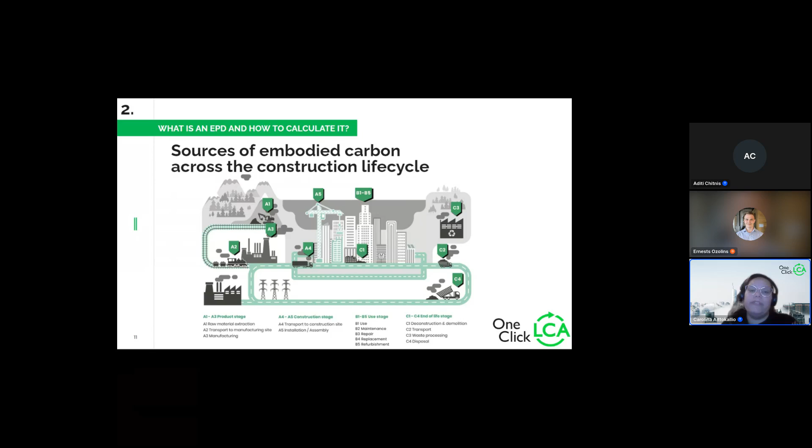After this, we have the C stage, that is comprised by the end of life. So it's everything about the deconstruction of that material, the transportation to the waste handling facility, the waste processing, and the disposal. Apart from these, we also have in the use stage the operational energy and water use, and we also have another stage, which is the D stage, that comes with the benefits and loads beyond the system boundary.

So now we're going to talk about the European roadmap for decarbonization and the CBAM. And it's very important to talk about these because as of very recently, doing EPDs has been in a way voluntary, but this is about to change and very fast. So the European Green Deal is a climate pact setting in motion different policies by the European Commission to review the laws on climate matters and to introduce new legislation on circular economy, building renovation, biodiversity, farming and innovation. In terms of the targeted emission reductions, they have been changed from 50% to 55% by 2030, with the goal of making Europe the first climate neutral continent by 2050.

So if these goals are going to be met, there has to be other policies that are going to detail how these goals are going to be met. And these will affect not only the construction of buildings and infrastructure, but also the products that are involved in it. In terms of the proposal regulation for eco-design for sustainable products, there are some guidelines that are being taken into consideration. For example, extending the product life cycle, reducing products' carbon and environmental footprint through the life cycle assessment methodology, ensuring products are in line with circular economy principles and carbon neutrality, also minimizing and preventing waste while focusing on material recovery, and maximizing the material's potential for recycling.

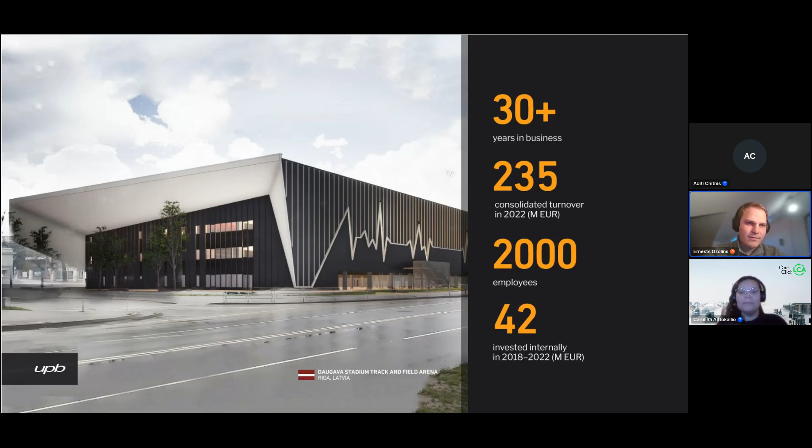Okay, so hi, I'm Ernest. I'm from UPB. I'm a product manager of precast concrete products. And today I'm going to talk to you about CO2 net zero strategies and the short-term activities that we as a group are taking to reach these targets. But firstly, about UPB Group. We are one of the leading industrial holdings in the Baltic states, and we provide full design and build projects and products for Latvian and also export markets. We are 30 plus years in business, and we have 2,000 plus employees working in the company.

About the CO2 problem, and why do we even bother reducing emissions? The carbon emissions cause the greenhouse effect, which then leads to climate change. But climate change then causes an increase in natural disasters such as wildfires, hurricanes, floods, and so on. Then in 2015, there was the Paris Agreement, where countries around the world agreed to reduce the carbon emissions made by each of the countries, and that kick-started the thinking about emissions and so on.

But then in 2021, the EU signed a climate act, which essentially stated that by 2050, the EU wants to become a carbon neutral continent. And that then also causes new rivalries between companies to see which company can provide a greener solution for each of the projects. Then what are the net zero strategies that can be implemented? Firstly, we can start by minimizing waste, which would be prefabricated products instead of cast on site.

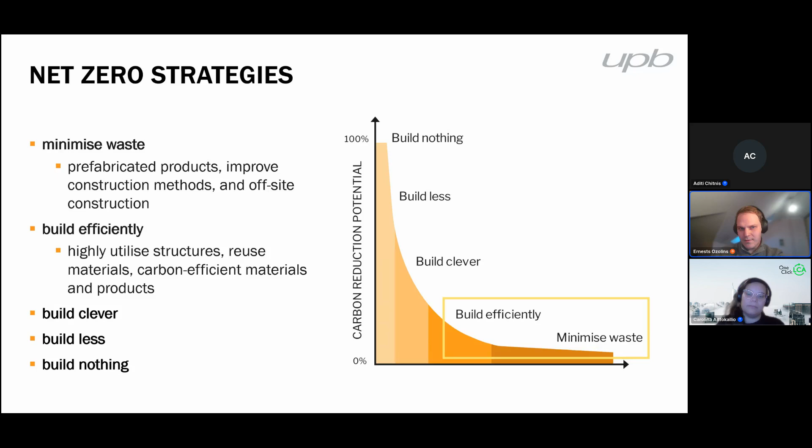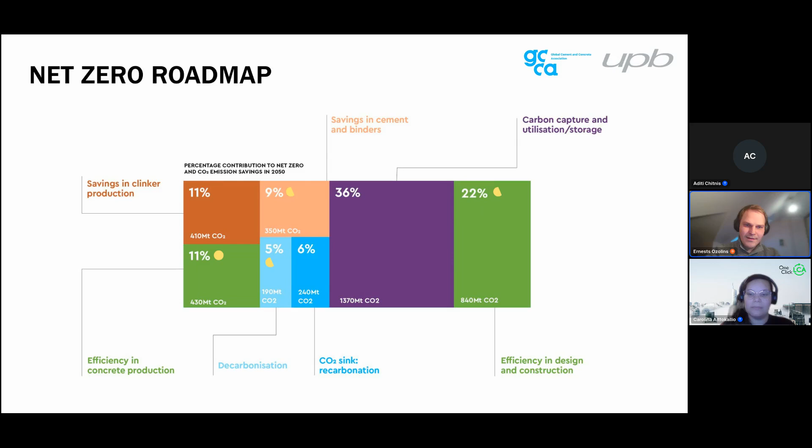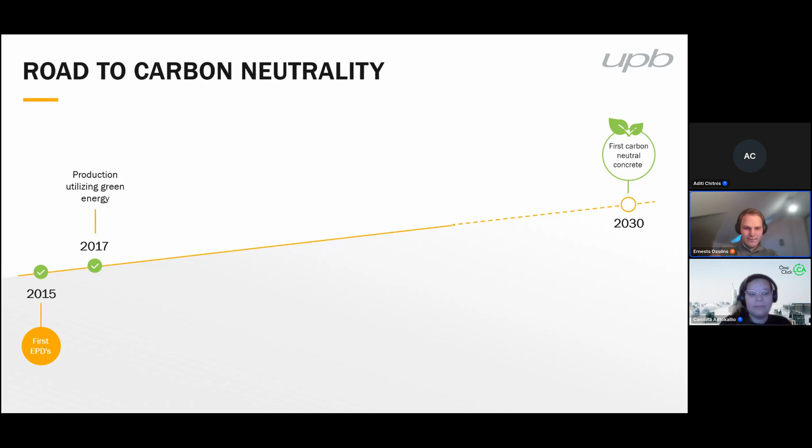Then, as a group, our road to carbon neutrality started in 2015 when we created our first initial EPDs. In this case, we didn't do it ourselves, but there was an outside company that did it for us. But then in 2017, we started using green energy in the factories instead of the normal energy that can be produced from fossil fuels. And then in 2018, we implemented a new steel mesh welding machine in the factory that significantly reduced our steel waste amounts in production.

And then in 2019, there was this concrete research center, which is like internal brains for concrete production. There was a great reorganization of that, which led to 2020 when we updated our EPDs and achieved much better results. Not only because we did all of these things before, but we also used One Click LCA to produce our EPDs this time ourselves, which allowed us to really understand what makes up the carbon footprint of our product. Then in 2021, we implemented a concrete and wastewater recycling system in our production facilities.

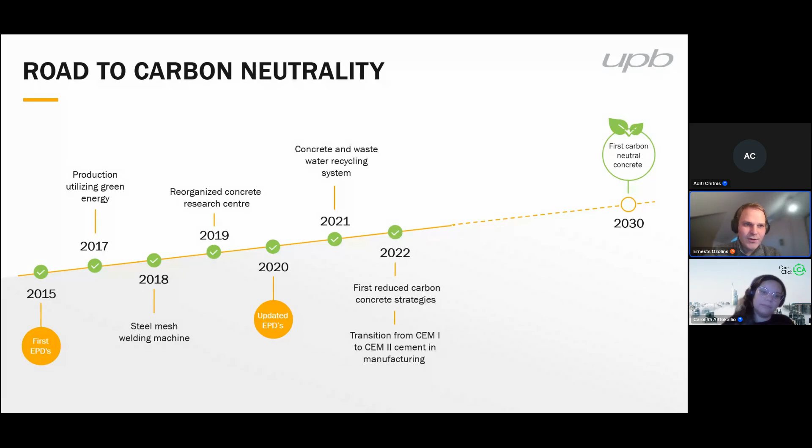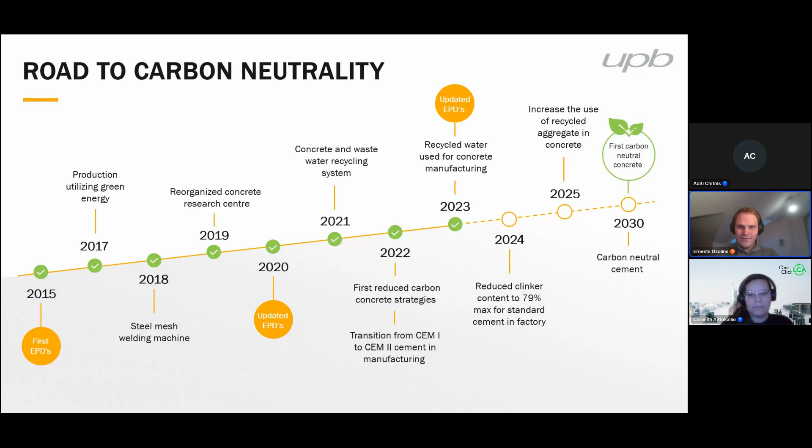And in 2022, we developed our first reduced carbon strategies for production and also moved from CEM I to CEM II as a default cement in the factory. Then this year, we started using the recycled water in concrete manufacturing, as well as already updated our EPDs from 2020. As you can see, the amount of years between each EPD is already starting to shrink. And then next year, we are planning to use even greener cement than our current CEM II as a default cement in production. And then in 2025, we're planning to increase the recycled aggregate content in our concrete. And then the aim for 2030 is to produce the first concrete for which the cement has been produced with the carbon capture technology. And that would be our aim for the carbon neutral concrete in the future.

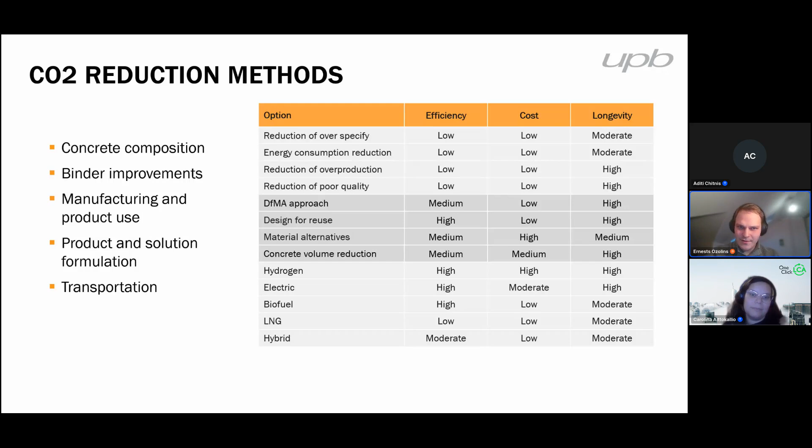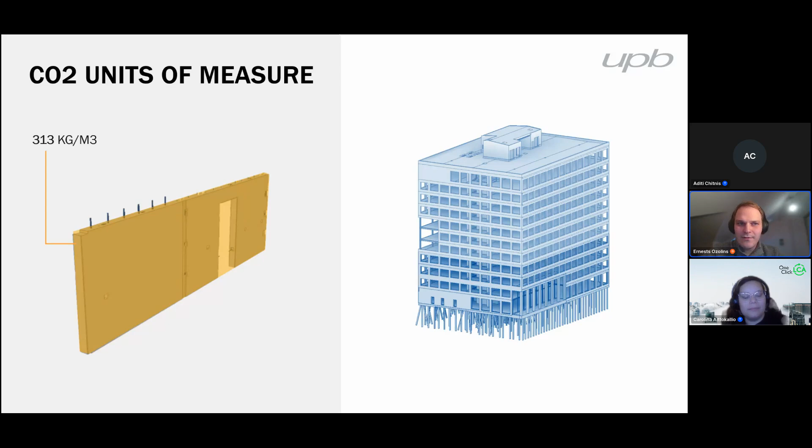And another really important thing when looking at EPDs is the units of measurement. For example, there's a precast concrete wall here. If we would look at the CO2 emissions, then a cubic meter of this wall would have 313 kilograms of CO2. But then a square meter of this wall, the same wall, would have 62 kilograms of CO2. Then 1 ton of this wall would have 130 kilograms of CO2.

So you can see the difference between what is the reference unit that you're looking at and how that affects the CO2 results. But finally, when we actually build a building, what we're looking for is the CO2 result for usable surface square meter area of the building.

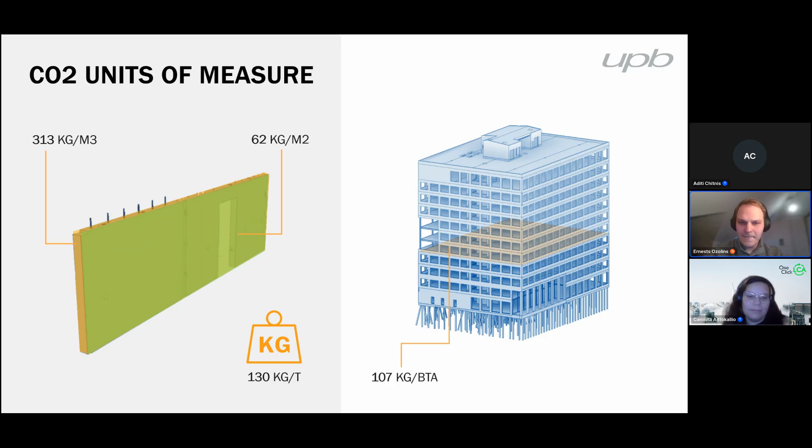Looking a little bit more closely at the EPD itself, what we pay attention to when we look at other producers' EPDs or our supplier EPDs is the place of production. So are we buying the product from a certified place? And also really important is the validity date. So is this EPD valid? And as I said before, it's really important to also look at the functional unit. So what is the declared unit of the product in the EPD?

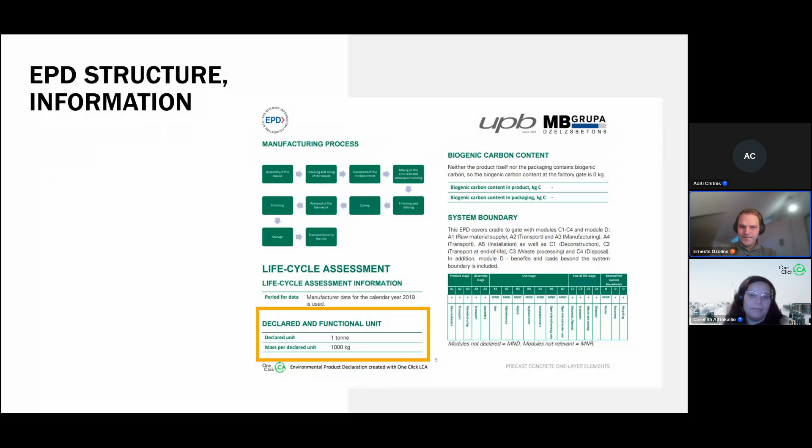And then, as a producer and for many people, the only thing they look for is the A1 to A3 number, which is the climate change total. Of course, all the other parameters that are calculated are really important, but currently our main focus is the CO2 number.

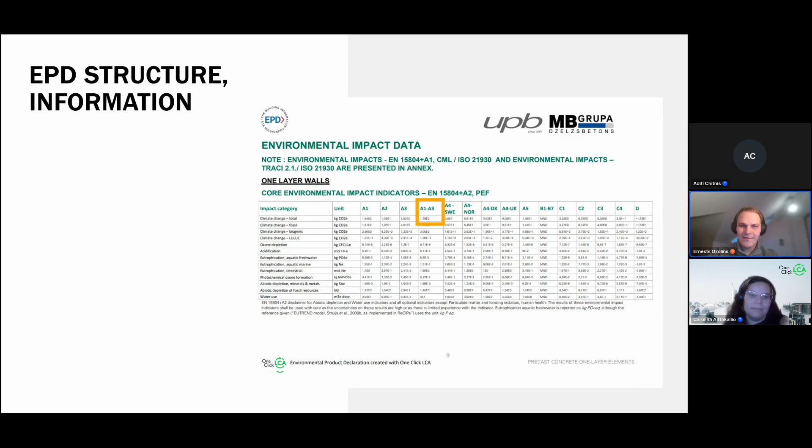And then when looking at the building, what we did was we calculated emissions for a full building and also looked at which elements of the building produce the most CO2. And in this case, there were hollow core slab elements, one-layer walls, and sandwich walls, which are 3-layer concrete wall panels. So these 3 panel types combined produced almost 89% of the total emissions of the building. So these are the most important panels to be optimized for CO2.

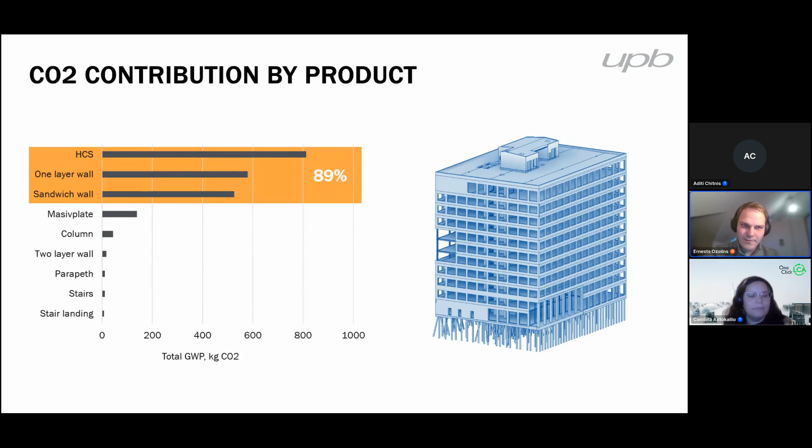And then looking a little bit closer at our road to this year's 2023 EPD, and also strategies on how to reduce the emissions even more. So when we do the EPD or calculate CO2, we not only look at the total emissions of, let's say, a single layer wall element, we look at the parts of the element that produce the emissions. In this case, it's the concrete, the steel reinforcement, the steel details, and then we also look at our production emissions.

What we can see here is that from 2020, there were improvements in almost every part of the product. So there were improvements in concrete CO2 emissions, as well as a big improvement in our steel reinforcement emissions. And this led to this year's EPD.

But then during this process, we also developed 2 different strategies on how to reduce the CO2 even further, which are mostly concrete strategies. We can obviously do some lab tests and see, yes, this concrete composition might be good at CO2 reduction, but then we have to check if what we think on an Excel spreadsheet actually results in lower CO2 emissions. So we plug the numbers into the Product LCA, and then we see, yes, our theory was correct, and the strategies B and C allowed us to reduce the CO2 emissions of the product by approximately 10% for each step. You can see the results here.

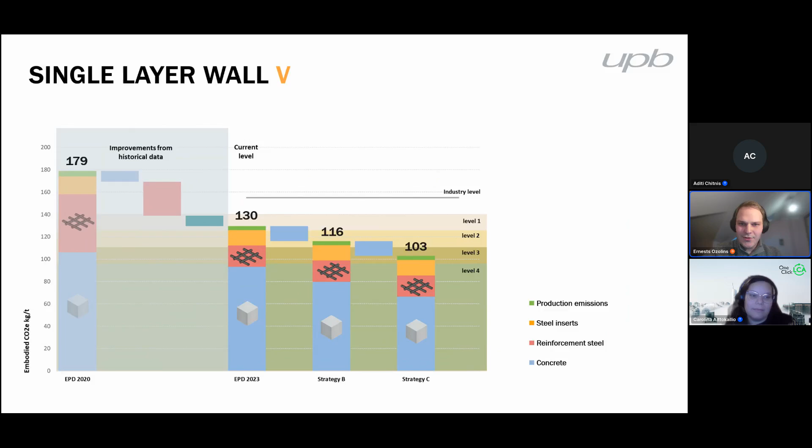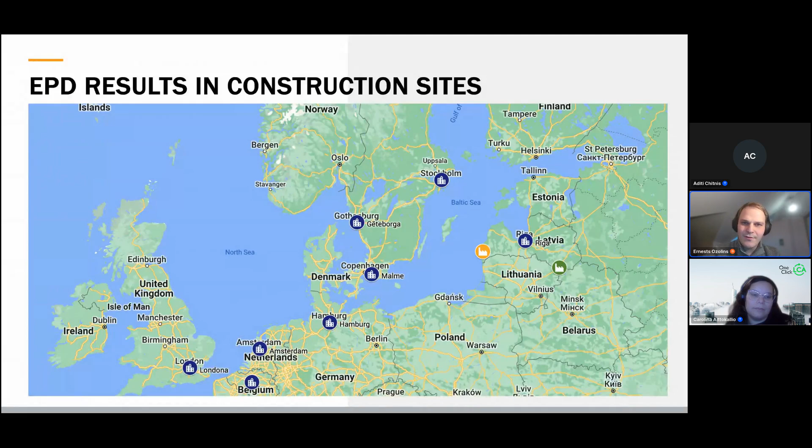And as I mentioned before, we work mostly in export markets, which means that not only the A1 to A3 CO2 emissions are really important, but also we need to optimize transportation emissions. That involves checking which transport option is better for each of the legs of the transportation. So, is it more efficient to transport by sea to London, or is it more efficient to haul it from Latvia to London by truck? Because the kilometers vary and everything varies. So you need to check which is the most efficient way to do things, not only financially but also in terms of CO2.

But what is driving these lower emissions is the carbon emission limits in many countries in Europe. In Sweden, from 2025, there will be limiting values for buildings of, in this case, 6.6 to 9.2 kilograms of CO2 per usable square meter per year, taking a 50-year design life as an example. And for buildings in Sweden, the UK, Denmark, France, and Finland, that's the overall CO2 emission of the whole building. The frame, the concrete and steel, is only one part of it. So we have to fit into this number.

And what is important is that these goals of countries are only going to be reduced further. So by 2030, Sweden wants to reduce their emissions by 61% compared to 2020.

And what we find is that currently we are able to achieve these targets, but when it's coming to 2030 and beyond, we see that it is only going to be more challenging to achieve them. And that's why we still need to evolve and evolve.

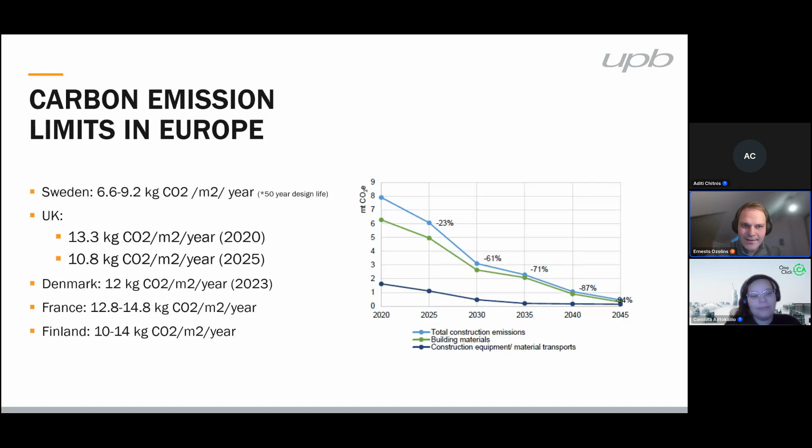And as you saw initially, if from 2015 to 2020 we updated our EPD every 5 years, then from 2020 we already skipped 2 years and updated our EPD in 3 years' time. We see that in the future, it is only going to be a shorter period of time when there's enough improvement in the result that a new EPD should be created to show the improvement.

And then in summary, as a company, for net zero strategies, we minimize waste and build efficiently. For the net zero roadmap, we optimize concrete production, we substitute cement clinker, we improve efficiency in design and construction. For the CO2 reduction strategies, we see that carbon capture is going to be most effective for cement decarbonization.

And during this CO2 calculation cycle and EPD generation and verification, we as a manufacturer have produced three improvement strategies for CO2. And we see that CO2 limiting values for buildings is a reality, and the limiting values are only going to decrease in the future.

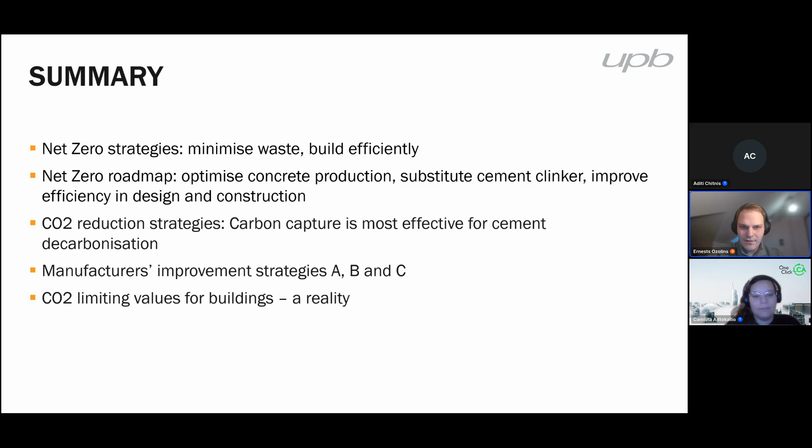Thank you, Ernest. That was very good to see how it works also for you on this side, representing UPB as a manufacturer, and how having the EPDs, and not just having the EPDs but working on your product LCA, has had an impact on the company business as well, how it will impact in the future, and how you're taking that into consideration for your strategy too. Yes, that was very good to see.